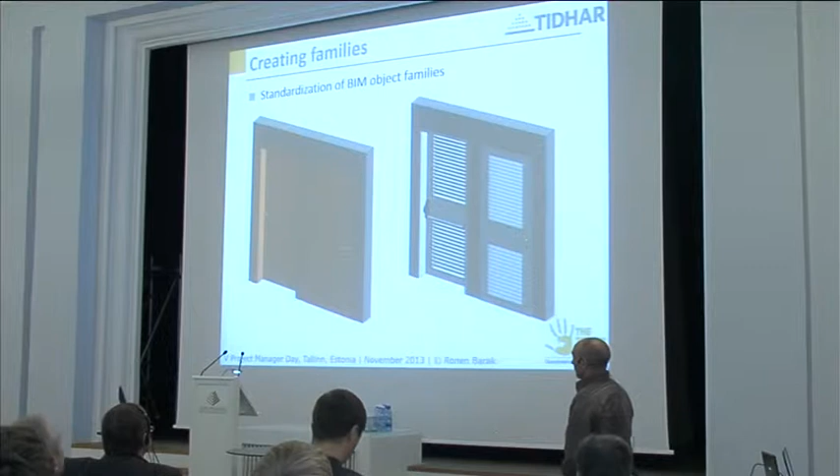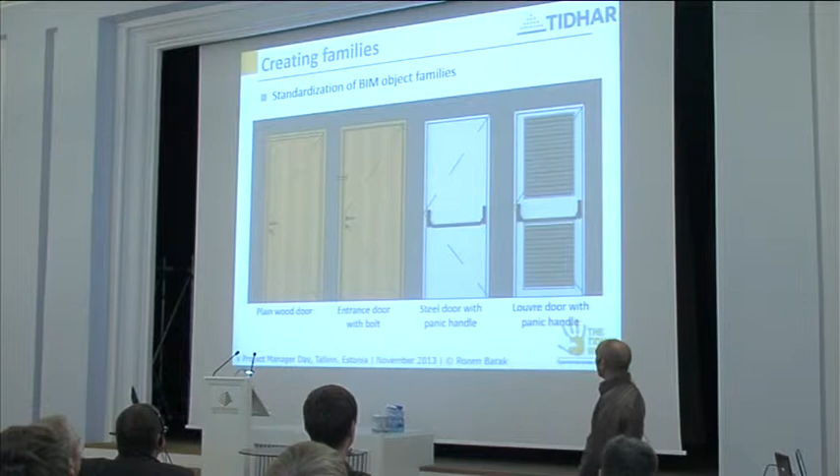This is another example, standardization, the doors, okay? We try to make the doors as standardized as we can, different doors for different needs. This is the same, just in projection.

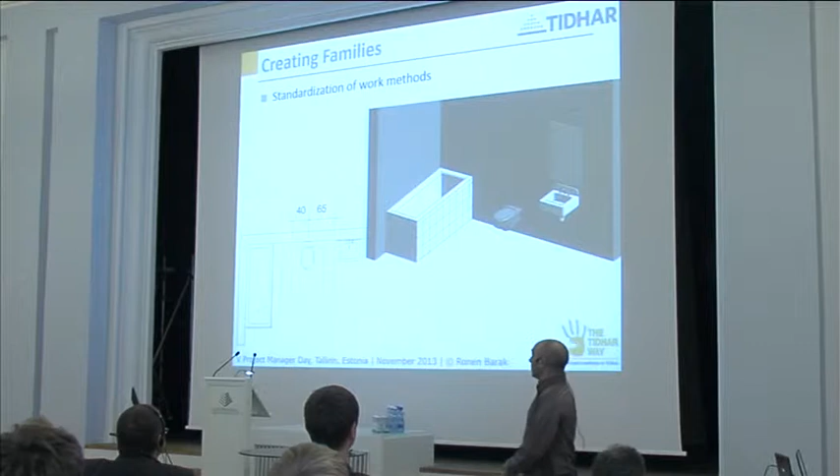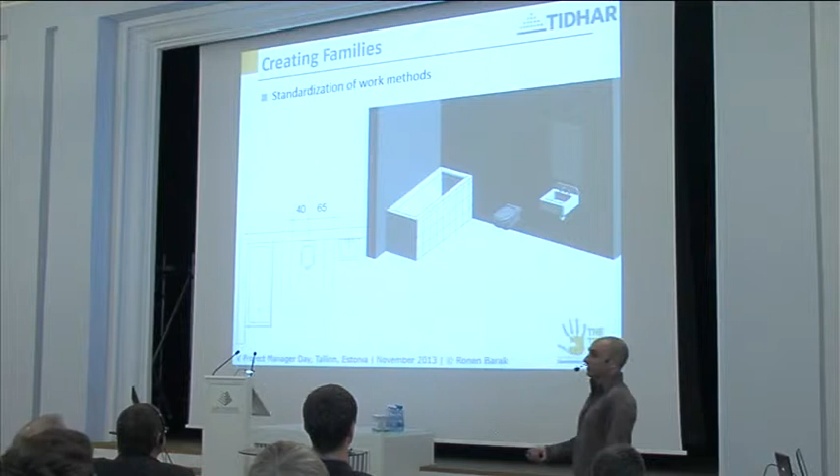We started to work on work methods. For example, if you put a toilet, the Israeli code says that the sink needs to be at least 65 centimeters away from that toilet, and the bathtub at least 40 centimeters. So we wanted that knowledge to be part of our model, so we went through that as well.

So that was the preparation. Like I said, it took us like 8 months. During that period, we did do some pilots, very narrow pilots, in order to understand if the way is correct, if it's the right path. And then we got to the full-on first pilot.

The project is Yavne. Yavne is one of the towns in Israel. We built there - it was again a full neighborhood, but we took only one building out of that neighborhood.

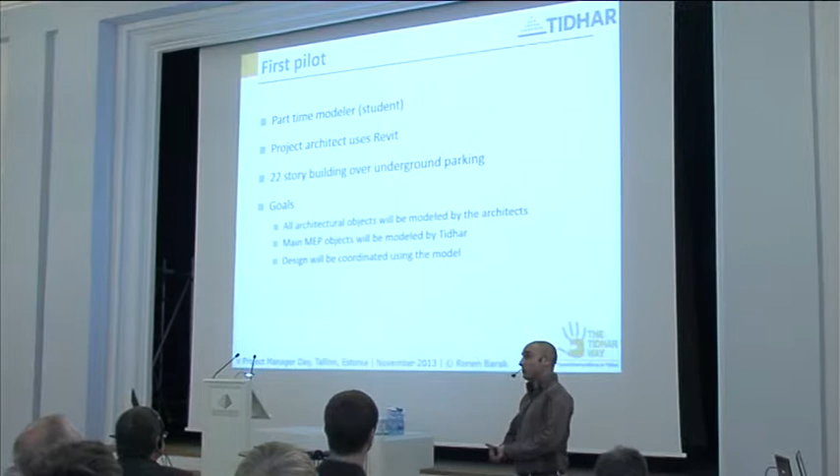For the first pilot, we took a part-time modeler, a student, and the project architect. At that time, after 8 months, we managed to bring one architectural firm to use Revit, and we had a good partner there, a good modeler. It was a 22-story building over underground parking, and the goal was to model all the architectural objects, model the main MEPs, and do some design coordination with the model.

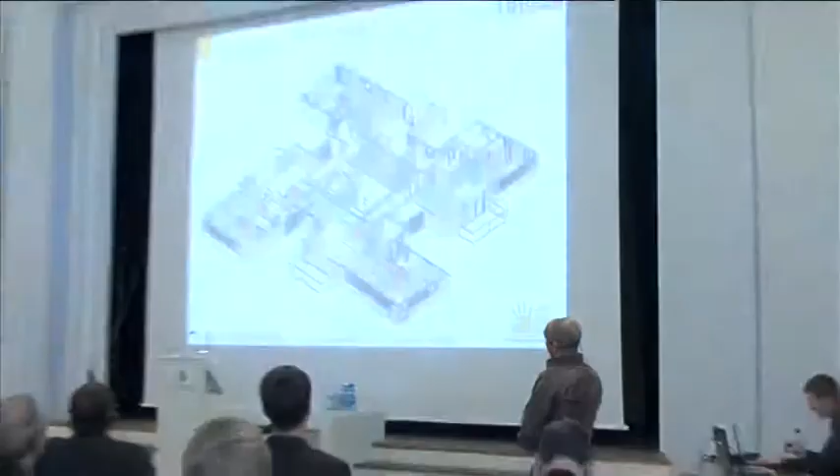This is the model created by the architect. That was the typical floor of that model. We have 20 identical typical floors, so that was easy. We spent a lot of time modeling the typical floor, but from then on it was just copying the same model to the rest of the floors.

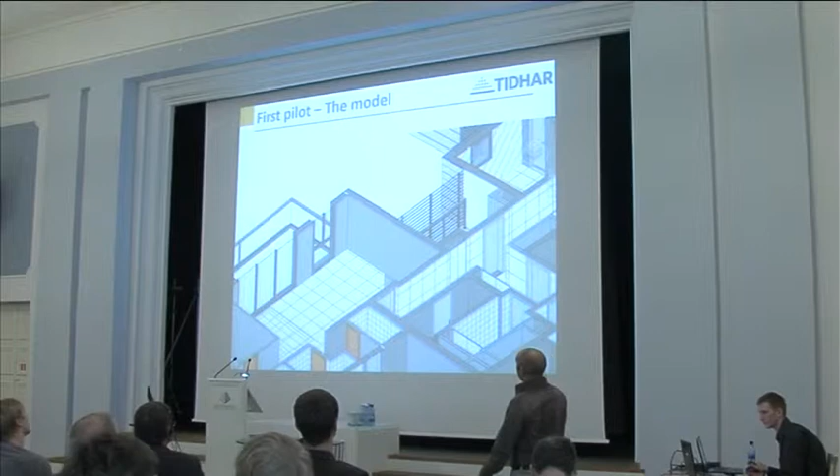This is the amount of detail that we model. We have all the aluminum walls and sliding doors, the different kinds of walls, the different kinds of tiles, everything, the different kinds of finishing in each room - everything was modeled in the architecture model.

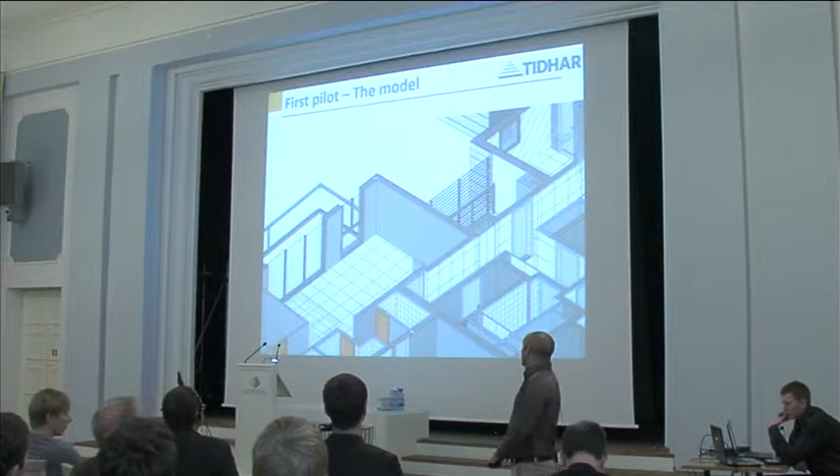This is the MEP model. In residential units, we don't have a lot of MEP, but still it was a good thing to exercise with, to see how we can get the most out of the site coordination.

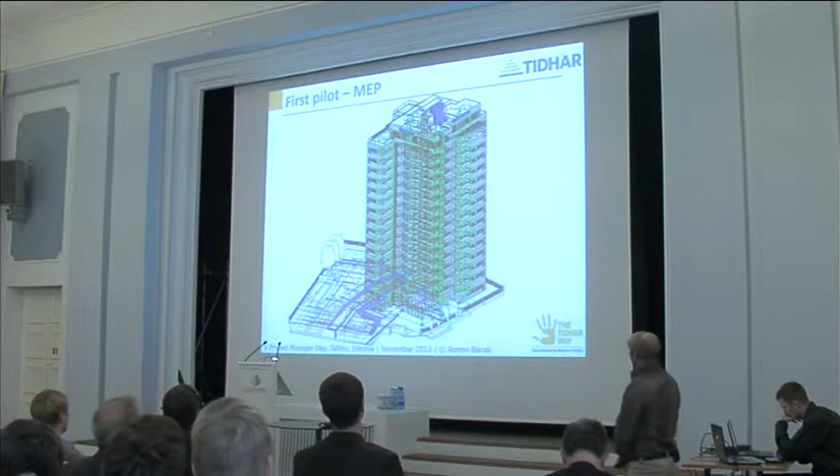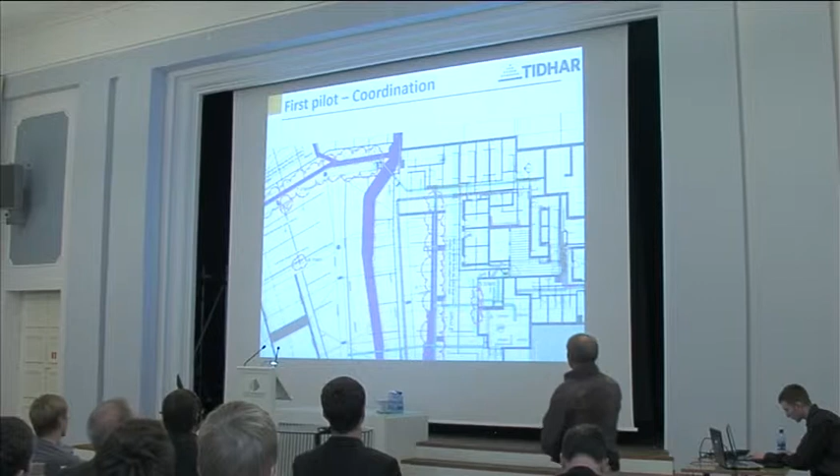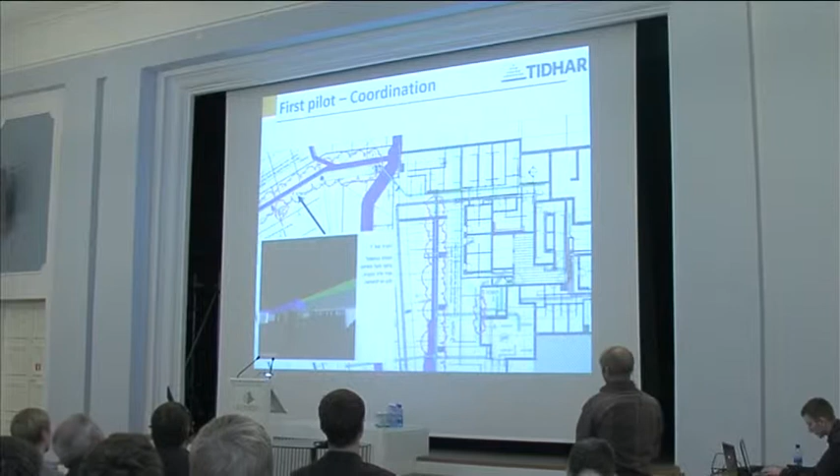This is another example from the parking. We use the model for coordination. You can see here the different remarks in the purple clouds. And of course, to every remark, we attached a 3D view of that particular problem in order for the designer to deal with that and fix it.

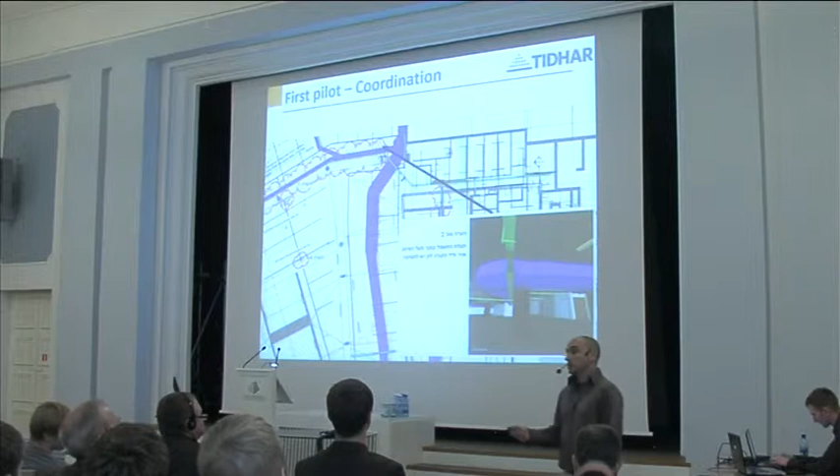We used a lot - we're not only using Revit. For design coordination, we use Navisworks, because it has a good clash detection engine and a good representation, much better than Revit.

So after we finished our first pilot, we decided that we're ready to get into a full-on project, and we decided to choose two projects. One is the Dawn Tower. It's a really complex building, 60 stories high, over four stories underground basement with parking. It's mixed use - it has commercial on the first 2 floors, offices on the next 20 or 30 floors, and residential units at the top part of the building.

CU is another project, an office complex with 4 stories of underground parking and 4 buildings between 9 and 12 stories.

Before that, we had to decide about the structure because we already had 3 different modelers and me. We had to think about the organizational structure and how we're going to deal with that. We decided that the actual modelers, the model manager, will be part of the design team in the project. They're not sitting in the office, they're sitting on the project site, helping the design team and the design manager.

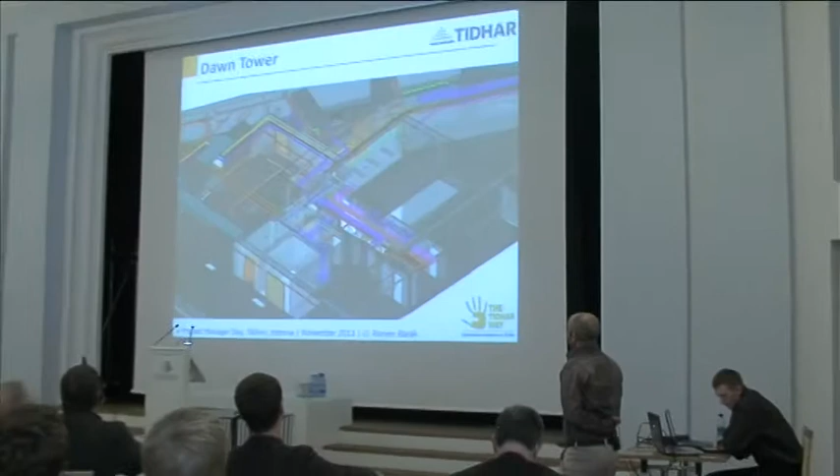This is part of the Dawn Tower - you can see how complex the systems are. This is part of the basement, the core of the building in the basement. Again, some more images.

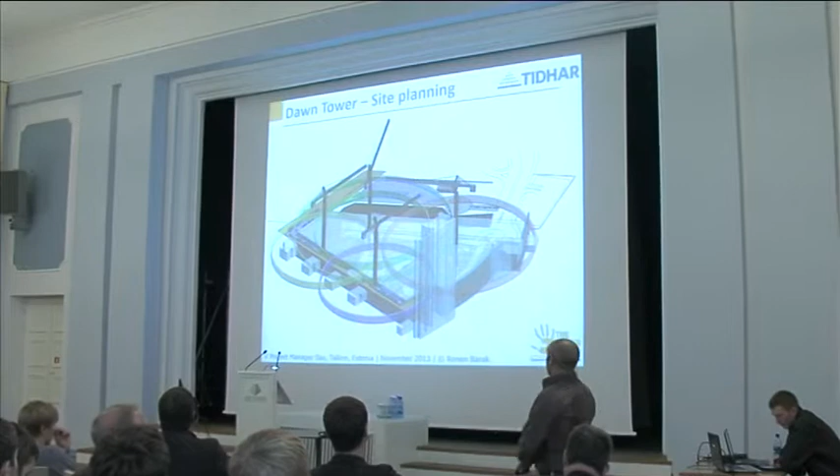We started playing with site planning as well, modeling the cranes and the different temporary structures that we're going to use, and seeing how it affects the project and the surrounding neighborhood.

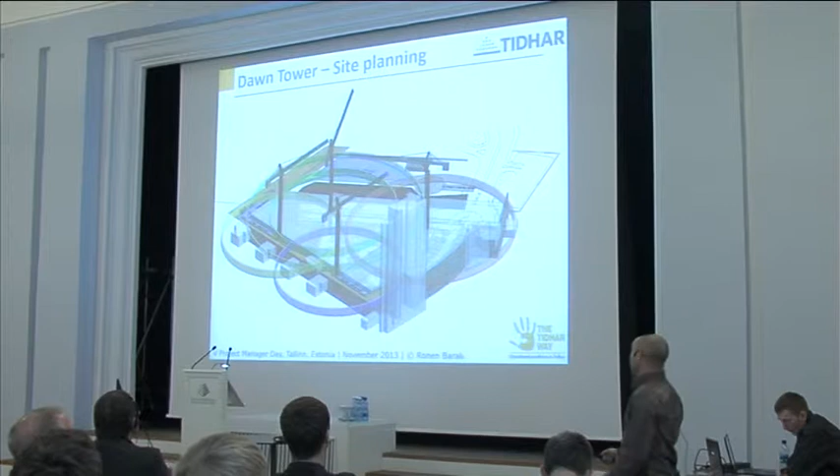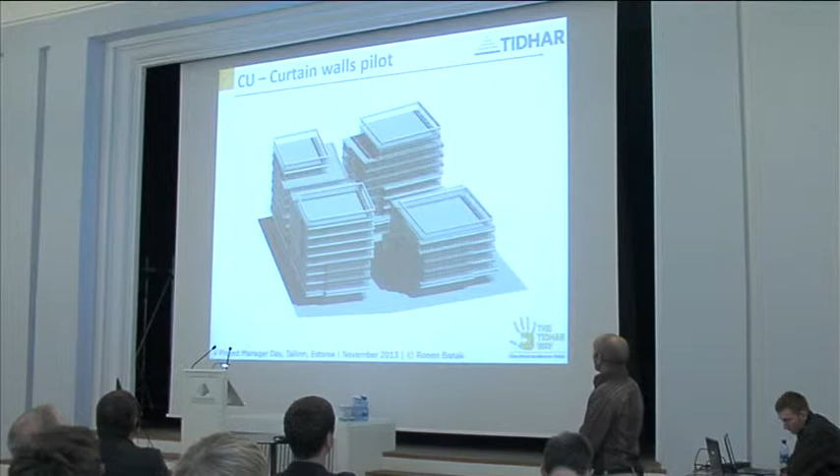This is the CU building, like I said, underground parking with 4 different office buildings, and it's a full curtain wall envelope, so we had to explore that. And again, we didn't know anything.

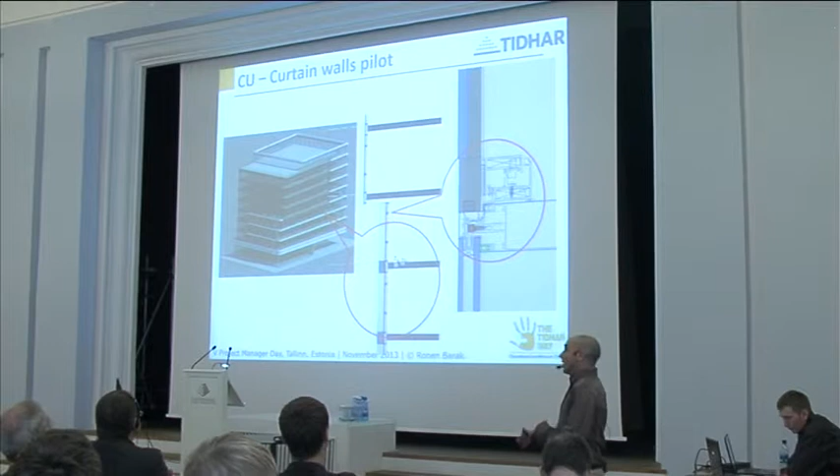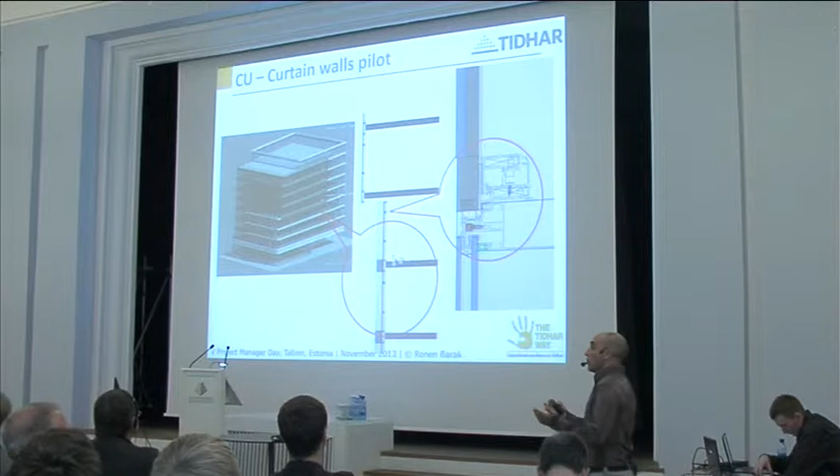We had to practice and play with level of details - how much are we going to put in, how much we don't need to put in. Working with the designers, working with manufacturers - what do they need from us? What will they be happy to get from us? What kind of quantities will they need? So we ended up doing that, and this is actually the level of detail we achieved.

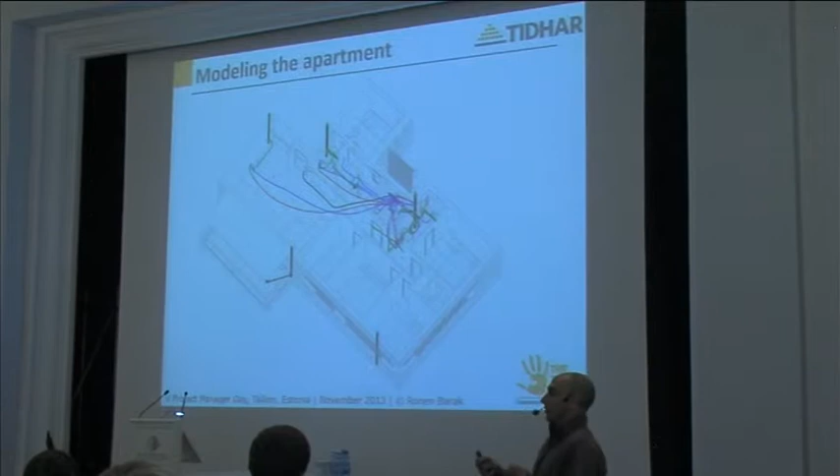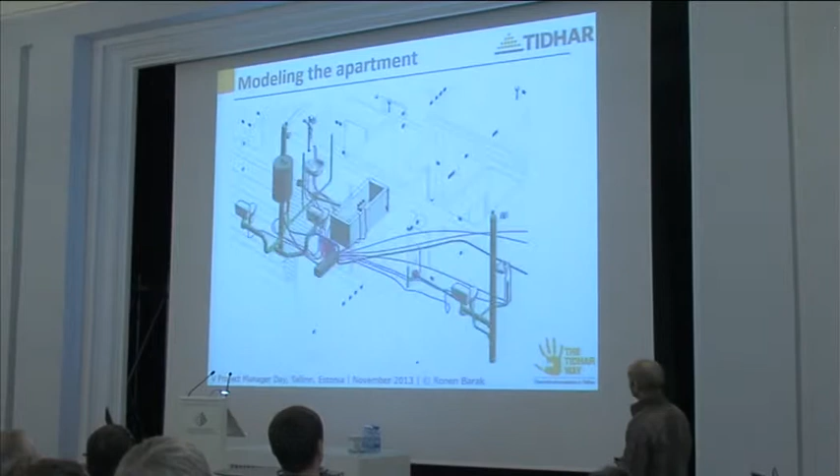So the idea here is to use design options. We have the standard design options, and we have the custom-made options. Again, some more images of the level of detail.

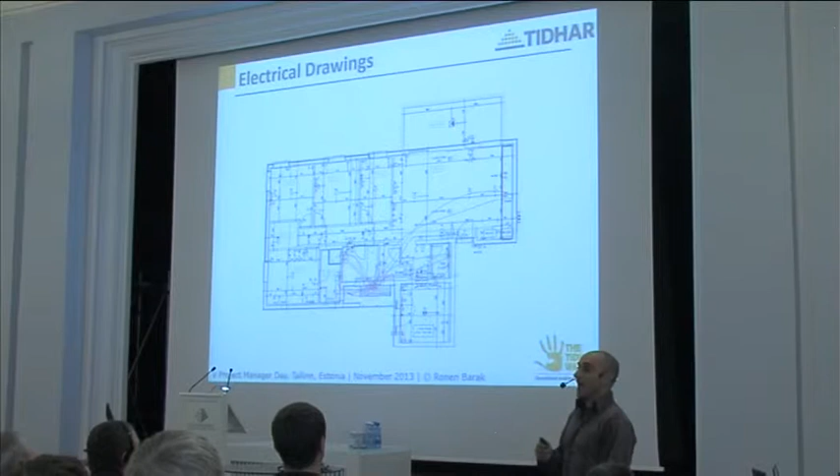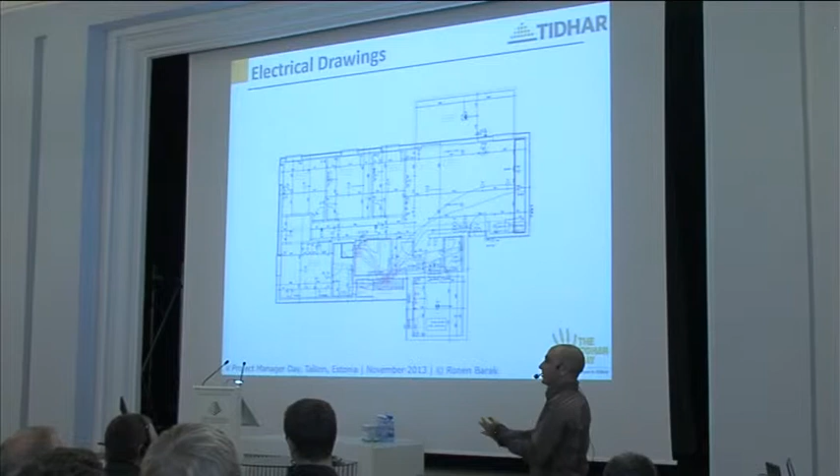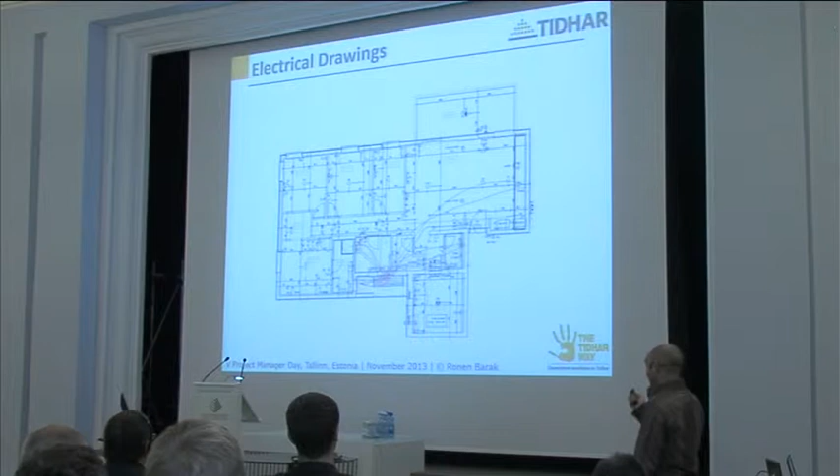So the idea is to create around 15,000 different plans, because we have 1,000 apartments. Each apartment gets at least 15 different drawings, depending on electrical drawings, plumbing drawings, partition drawings, coordination drawings, and so on. So we will end up with 15,000 different drawings. And this is the electrical drawings for the different solutions.

To summarize our journey - first of all, what we plan to do. We still didn't do structural detailing; we plan to do that this coming year in 2014. We are in the process of hiring the right people and buying the licenses. We plan to do some 4D scheduling with Vico, and again we're going to try to use quantity takeoff instead of Revit, using Vico.

Creating a model for tendering is a completely different story, because in tendering in Israel, if you're in a good place, you have 2 weeks to hand over a proposal. So how can you build a good enough model in 2 weeks? This is rapid modeling. We don't know yet, we haven't even started to explore that, but we know we want to get there and create modeling for the development phase.

What we managed to achieve: we have a better product design, better collaboration, shorter design period - 50 to 75% shorter - and better system integration. We still don't actually know the real results, because the first project where we coordinated the system with Revit is now under construction, but we'll see in the next few months if there's a difference in change orders. We know we did our best and are quite happy with the system integration. We managed to create standardization in the way we model and hand over information and knowledge organization.